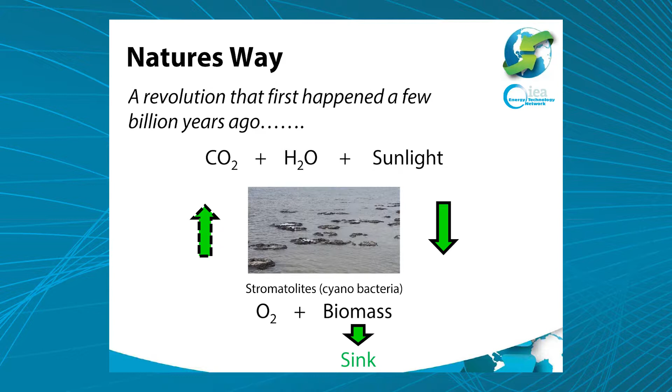So what's the source of our optimism about CO2 use? This has been the revolution that happened a few billion years ago that changed our world. Essentially, some organisms called cyanobacteria—this picture is actually of the stromatolites that I found at an ancient lake traveling through Western Australia. Those stromatolites are about 500,000 to 1 million years old. But rumor has it they were the first organisms that came into being that fixed CO2 in water with the help of sunlight and generated the oxygen in the atmosphere, and obviously generated biomass. That biomass went to sink, which is the source of a lot of our coal and petrochemicals. Obviously we are reversing the process when we use fossil fuels, not releasing energy back as sunlight but using it in other forms and putting CO2 and water back into the atmosphere.

So in order to be successful in utilization, we must in some fashion ape this process. Now, if I were to try and draw a diagram that looks at CCS, little U, and sustainability, this is the sort of diagram I would draw. Sequestered carbon, fossil fuels, when we use it, becomes a source of CO2. We can capture CO2, and if you look to your far right, if we don't tinker with that CO2 molecule and put it to storage, we've achieved a sort of limited sustainability, not quite complete sustainability, because the carbon is in a different form. But at least we are limiting some damage to the atmosphere.

The other option we have is, to your far left, where you use the CO2 to enhance the recovery of oils. You can use it for enhanced coal bed methane recovery, which needs to be worked at, or enhanced gas recovery. So you push out more fossil fuels, you offset the carbon a little bit, and the fossil fuels become a little greener. Now the challenge we face is whether we can go down the middle pathway, and that pathway involves tinkering with the carbon-oxygen bond.

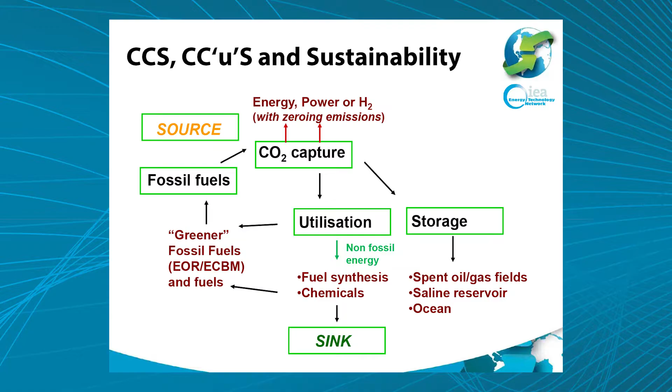That's what it boils down to. So that's the picture about sustainability. But as I mentioned before, as soon as we start tinkering with the bond, we hit a roadblock called the energy dilemma.

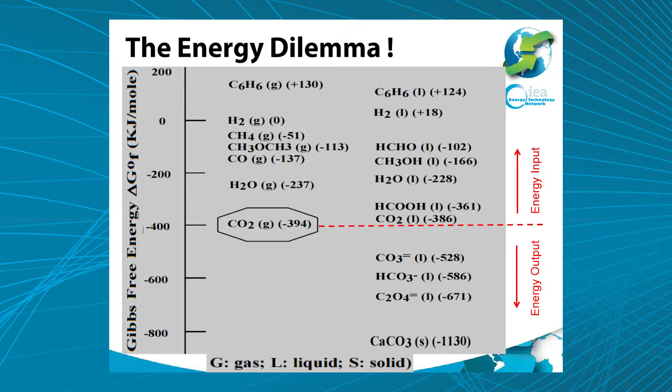This is a plot of the Gibbs free energy, and it looks at various chemical compounds. I've drawn a line across from CO2. Any molecule above that line, its synthesis requires the input of energy - you have to put energy in to convert CO2 into any of those chemicals above it. Any of the chemicals below CO2 are ones that will react and give you a little bit of energy in the process that you can recover. A leading example might be the formation of carbonates, where there'll be a net production of energy if you utilize CO2. So you have to be mindful of this when you're starting to tinker with CO2 in the utilization bond.

Next comes the chemistry dilemma, and this has to do with the emissions back into the atmosphere. Just about any chemical that you make, depending on how long you keep it in storage, at some point it's going to decay back to CO2, and it depends how fast that happens. So putting CO2 into soft drinks is a very, very temporary measure, for example.

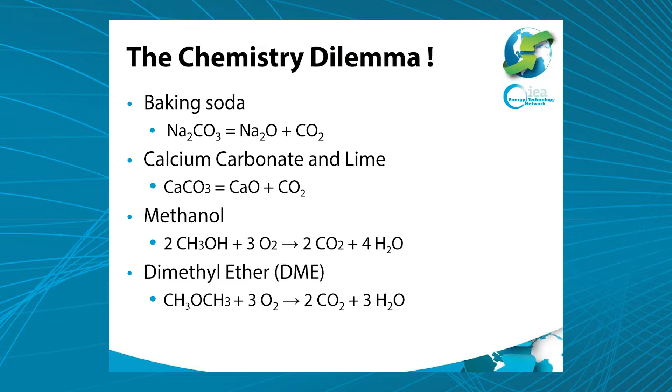If you make methanol, you run into a similar problem. If you make another fuel, dimethyl ether, you run into similar problems as well. Now the thing about carbonates is, often you don't find free sodium or calcium floating around. So in order to work with sodium and calcium, you have to naturally mine carbonates, expel the CO2 before you recombine it again. So you have to be very careful in terms of what you do. These are the two critical elements you have to look at.

So there are a number of things you can do in terms of making chemicals, fuels, all kinds of things. And the problem with this plot is, in the middle, you don't start with CO2 and hydrogen, you start with CO and hydrogen. In order to start with CO2 and hydrogen, you need to put in energy to get down those pathways, and that energy, I'm afraid, has got to come from a non-fossil resource.

So several options are available, most of them temporary at best. Let's look at the case of urea as an example. This is often one of the things that is touted, outside of EOR, as something you can use to utilize CO2.

So that's the chemical compound, and what it does is it eventually decays when you use it into CO2, ammonia. Ammonia is oxidized into NO3, and it also releases N2O, which is itself a greenhouse gas. The CO2 may be taken up by plants and roots, but eventually it's lost in the plant cycle when the plant dies or the soil is tilled. So it's a kind of interesting case. Clearly you have to do some life cycle analysis on it.

And if you go back to how we make urea: if you start with coal, you produce a syngas, you're essentially separating CO2, using the hydrogen to make ammonia, and then reacting the ammonia with the CO2. Except that when you're making ammonia from coal, you use twice as much coal to produce the hydrogen you need in ammonia. So you're producing excess CO2 anyway in the process.

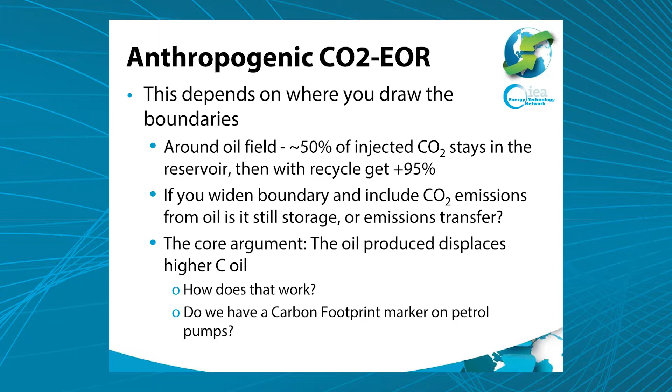Well, ultimately, you do end up putting some CO2 down for the oil that you produce. So the oil might be, if you like, produced less carbon intensive. But we have to be careful in terms of the steps we take with this. And we know that world oil demand is going to continue to rise. Global emissions from transport are rising. So we have to be very careful to make sure that it's just not a simple temporary emissions transfer.

We looked at the potential of CO2 utilization when we persuaded the IPCC in 2005 to write a special report. And then, when we looked at the consumption of CO2, excluding EOR, the potential was about 120 million tons a year. Some of the processes stored CO2 for several decades, and the century-scale storage equated to about 1 million tons a year in the numbers we looked at.

For CO2 EOR, looking at light oils only, the estimates that we've come up with in the IEA Greenhouse Gas Program globally pitch this at 60 to 120 gigatons of CO2.

We just saw a plot from Peter Cook earlier on that I think pitched the global emissions currently at about 39 billion tons a year. So that's what we are emitting. And if you look at what the IEA CCS roadmap says that we should achieve between 2010 and 2030, we've got about 445 gigatons of CO2 to put underground.

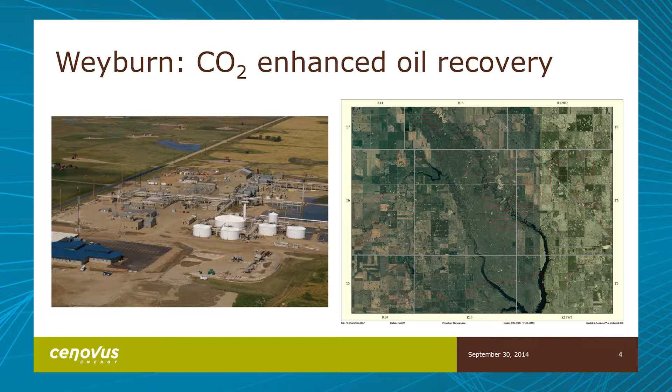We operate the project. It's a fairly large project area, 22,000 hectares, and we operate it on behalf of a unit. We're the unit operators, 23 partners in that unit. Our share of the unit is just over 60%.

Weyburn is one of Canada's largest enhanced oil recovery operations, as well as one of the largest CO2 utilization and storage projects. So let's just take a quick walk through some of the geology.

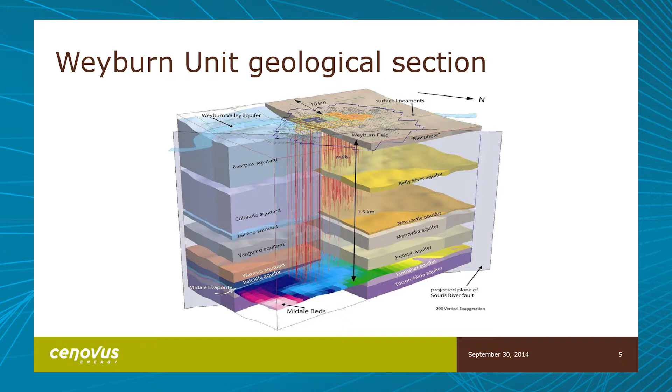The oil pool is part of the Williston Sedimentary Basin. It's about 1,450 meters deep. The oil is produced from the Midale beds, Mississippian Charles Formation. The Marly and the Vuggy are the two zones for that. The reservoir is relatively large, with 1.4 billion barrels in place, and we've produced about 30% of that at this point in time.

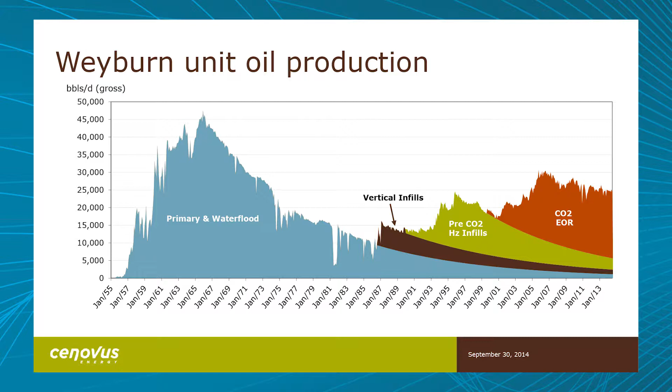And then in the late 1990s, we established a CO2 EOR scheme. CO2 flooding is expected to extend the life of the Weyburn field by another 30 to 40 years and lead to an estimated 200 million barrels of incremental oil production.

Although we've started a CO2 flood, we still use water flooding today and inject about 250,000 barrels a day of saline water for that water flood. Our production is about 26,000 barrels a day. About 60% of the Weyburn field is under CO2 flood.

So extending the life of the field isn't just good for Cenovus and our shareholders. It's also good for the economy of Saskatchewan and the economy of southern Saskatchewan where we operate, and investment in the community. We'll be investing in the community for years to come.

So really, what is CO2 enhanced oil recovery? In some aspects the technical details are complex, but really it's a simple concept. Under primary recovery, we use the reservoir's energy and mechanisms to recover some of the oil. Water flooding uses injected saline water to basically sweep more of that oil to the producers.

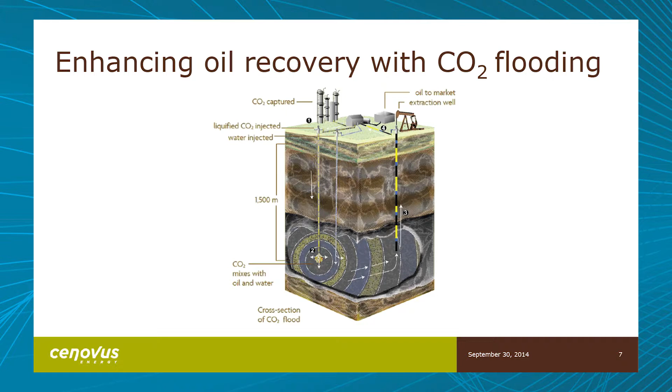For CO2 EOR flooding, it's really just like using a solvent to wash the rock. The CO2 is injected as a high-pressure liquid and washes the oil between the pore spaces. It effectively lowers the viscosity of the oil, and it swells the oil so that it expands out of the pore spaces. So it's a simple concept, really.

The CO2 and water are produced back with the oil. They are then separated and re-injected. This technique has been used in the enhanced oil recovery process since the 1960s, and it's quite common in the United States.

So what are a few considerations on the supply side for CO2? First, a large supply of high-quality CO2 is required, 95% pure as a minimum. It also must be stable and secure as a supply. Additionally, since EOR schemes are inherently expensive, another important element is the total cost to get the CO2 to the field gate and then down to the reservoir.

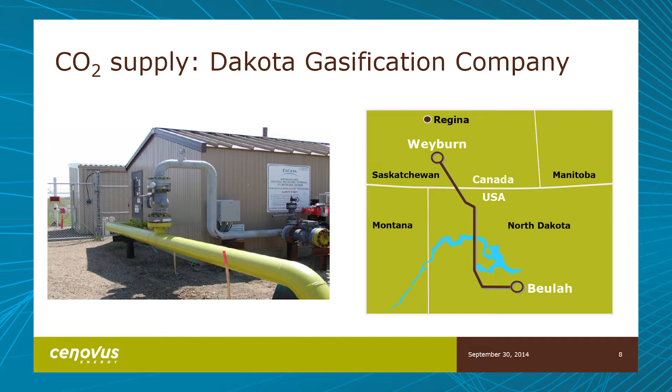At the start of our project, we came to an arrangement with Dakota Gasification Company in Beulah for a CO2 supply. DGC built a pipeline that brings high-quality compressed gas from Beulah to our Weyburn project. They still own and operate the pipeline, which delivers CO2 to our Weyburn project, as well as to Apache for their CO2 enhanced oil recovery program near Midale. The first CO2 injected into our reservoir at Weyburn was achieved in October of 2000.

First off, I'd like to congratulate SaskPower on their successful Boundary Dam carbon capture project. This new supply will ensure that we have a consistent and adequate supply of CO2, which is critical to maintaining and expanding our CO2 enhanced recovery project in Weyburn.

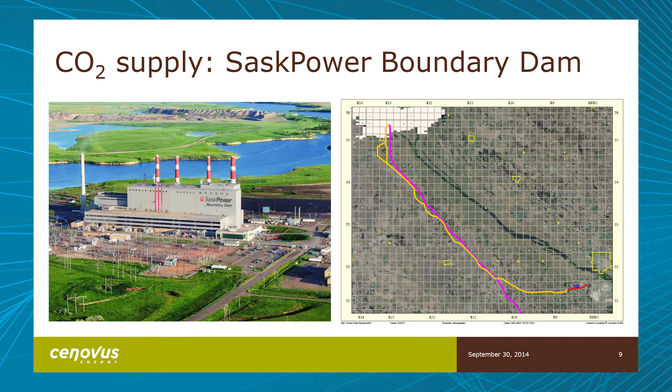In 2012, Cenovus signed an agreement with SaskPower for CO2 from their Boundary Dam project. As part of that overall project, Cenovus constructed a 66-kilometer pipeline from Boundary Dam to our Weyburn facility. To date, about 22 million tons of CO2 has been safely used at Weyburn since 2000.

Another aspect I can comment on is that this project, as well as Apache's EOR project, may be the most studied oil fields in the world. The CO2 monitoring and storage project was a collaboration between 6 governments, 9 industry participants, and many research institutes.

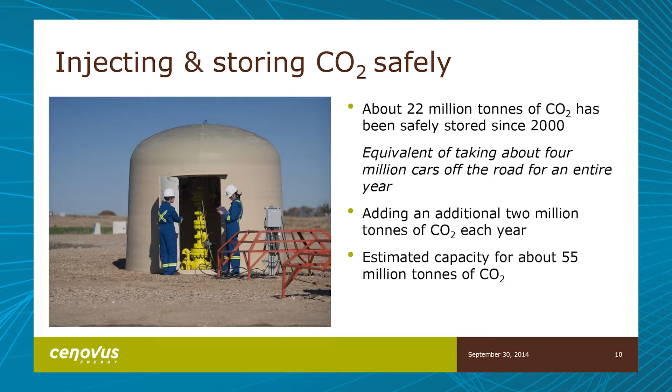The project has been managed by PTRC. The first phase verified the reservoir could safely and economically contain the CO2, while the second phase, which was just completed in 2012, resulted in the publication of a best practice manual for CO2 geological storage and a guide for field implementation.

So really, what does the future hold? I think we need to continue to move ahead on many of these fronts. Working with EOR as a demonstration and a synergy between the oil industry and power generation is a key aspect. Several other aspects we have to move ahead on, and we've talked about many of them today, and making progress is a key factor for us all. Thank you.

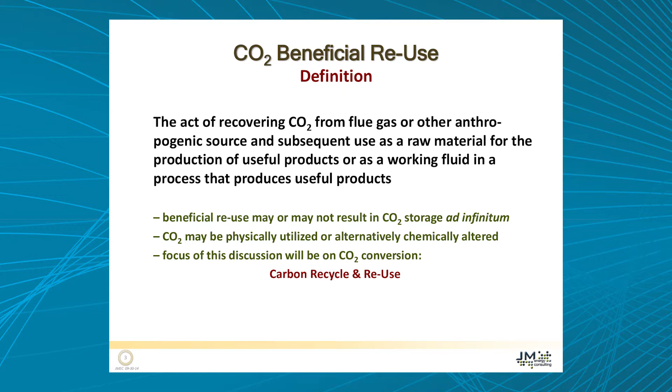And what I'm going to focus on - we've had a talk about EOR. I will mention EOR a little bit, but I'm going to focus more on this idea of carbon recycle and reuse.

Okay, we're already doing it - I'm going to use this as an example. In 2012, the U.S. consumed 14.2 billion gallons of renewable fuels, approximately 10% of the gasoline market. It was produced from biomass that absorbs CO2 from air at 392 parts per million. And if you do the math, half of that carbon up there is a result of the industrial revolution since then. So when you grow corn in particular, you're using fossil carbon because we've already put extra carbon in the atmosphere.

So where does that take us? Well, right now that's about 0.01 gigatons of carbon per year. It's not that much, and it's also not that renewable, so the benefit is much smaller. But again, the renewable fuels industry is also evolving, just like CCS is evolving. So they have a lot of room to improve and make greener, low-carbon fuels.

I think I would change this to say when we meet the renewable fuel standard. I don't think it's going to be in the U.S. in 2022. If the program continues, it's going to go up 0.03 to 0.05 gigatons recycled. One goal of the Department of Energy, sister organization to fossil energy, is to get to 1 billion tons, and they've done studies to show that. So that's like an order of magnitude greater.

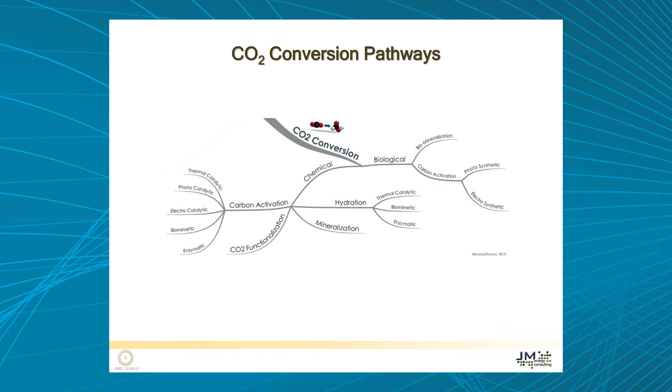Now, these pathways really boil down to three different flavors of CO2 conversion, and Kelly talked about this. There's mineralization—you're actually oxidizing the CO2, so there's potential for a slight exothermic reaction, getting some energy out. There's functionalization, adding CO2 to chemicals. Most chemicals we use are polymers, organic compounds, or built from organic compounds. So if you use CO2 as the source of that oxygen, you have the potential of improving efficiency while consuming some CO2 in the process.

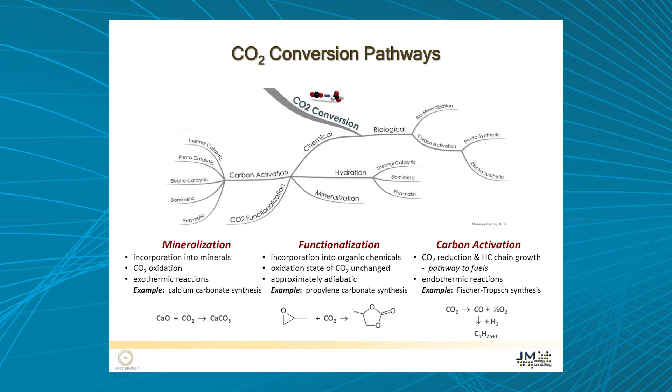And then really the holy grail is carbon activation—that's reducing CO2 and growing hydrocarbon chains. That's a very endothermic process, and the example of that is again Fischer-Tropsch synthesis, which would fall into that category.

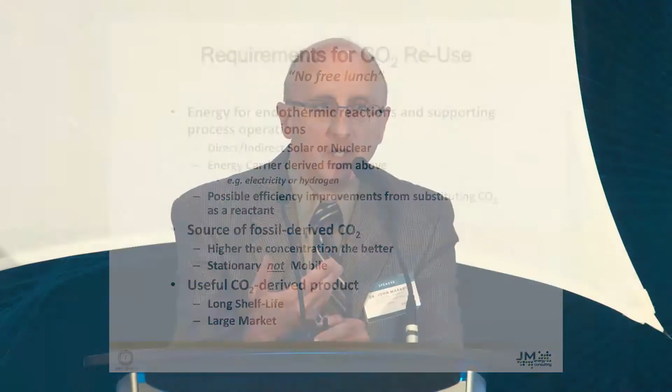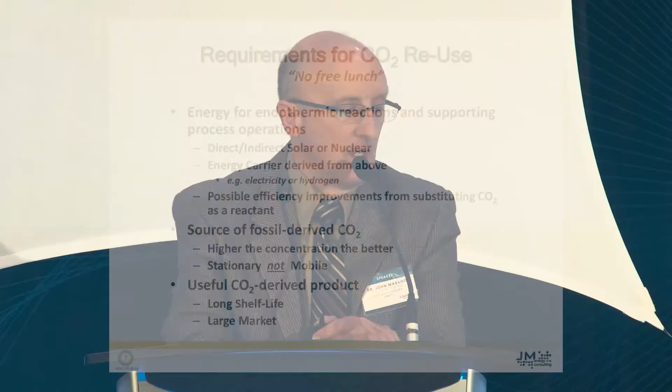Now, I won't go into this—Kelly did an excellent job talking about the energetics of it. So there's no free lunch. When would this make sense? If you require energy for endothermic reactions or any of the supporting processes, you have to have an outside source of energy. I've seen a lot of schemes where the power plant produces the energy to make chemicals from the CO2, and that's not possible.

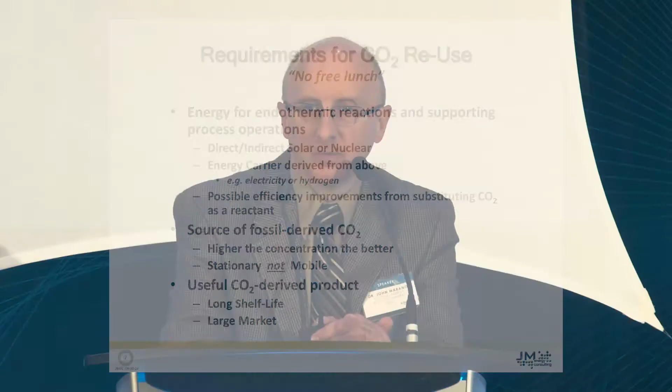So in that case, you need a renewable source, or nuclear energy would work for that. But you also have, when making products other than fuels, the possibility of efficiency improvements by using CO2. Again, in making organic chemicals you're wanting to add oxygen, so CO2 could be a source of that oxygen and improve the efficiency of the process. There are companies working on that—in particular Europe is ahead on that. Bayer is involved, doing work in that area.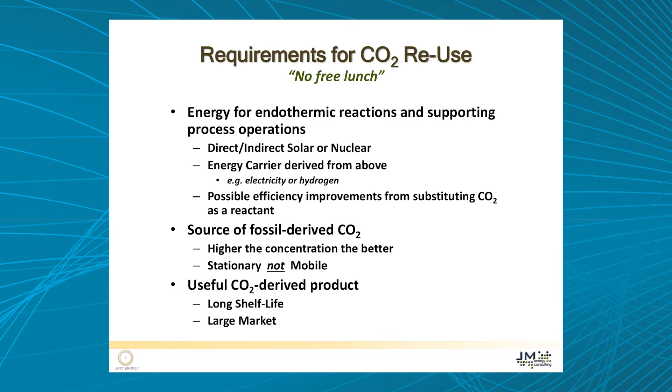What I want to do here is walk you through the kinds of things you can do, and I do have a slide on EOR. What I looked at when we were doing this was what had the greatest potential, but I think you also have to look at the economics. So anything that's going to help mitigate climate change, that allows carbon capture systems and sequestration to move forward, is positive.

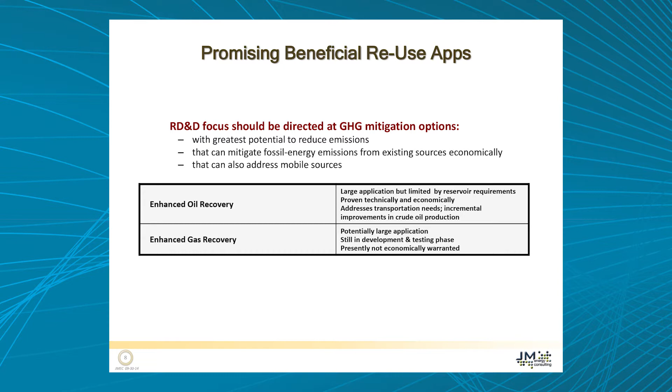So if you're making a small amount of a valuable material, it could improve the economics of the situation. There are some utilities in the U.S. that are looking at this as the low-hanging fruit. So if you regulate me and say I have to do 30-40% CO2 reduction, if 5 or 10% of that I can do with some useful product, that just lowers the cost of capture.

Now my focus has been on biological conversion, but I don't want to leave you with the idea that that's the only one or the preferred one. So these aren't in any order. Biological conversion to liquid fuels, chemicals, and food.

One of the issues with biofuels you always hear is food versus fuel. If you talk to people in the advanced biofuels industry, a really nascent industry, especially the algae companies involved in algae development, they say food and fuel. They're not talking about necessarily wanting to eat the algae, but a high-value product is feed for production, primarily meat and fish.

So if we go outside of enhanced oil recovery, which is commercial and has economics and is technically possible, algae is probably the closest. I see some demo plants really coming in 5 to 10 years, and the economics is driven like the economics of CCS. It's a regulatory-driven thing, basically by low-carbon fuel standards. So there's a driver for that.

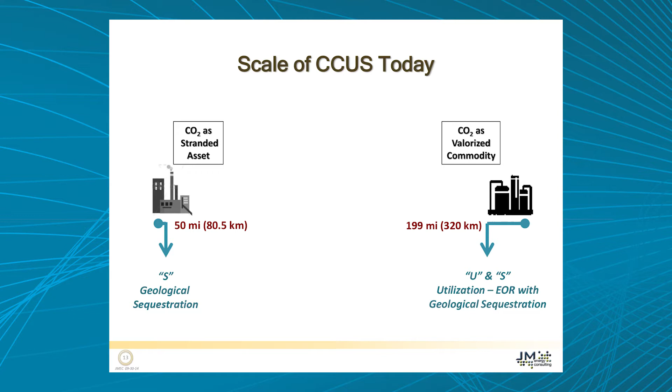What we need in the future is to connect this up. The driver here is that if you can't get something to a market, it's not worth anything. So I liken this to building the transcontinental railroad in the U.S. and in Canada. The idea was to connect the east and west coast, and the result was build it and they will come.

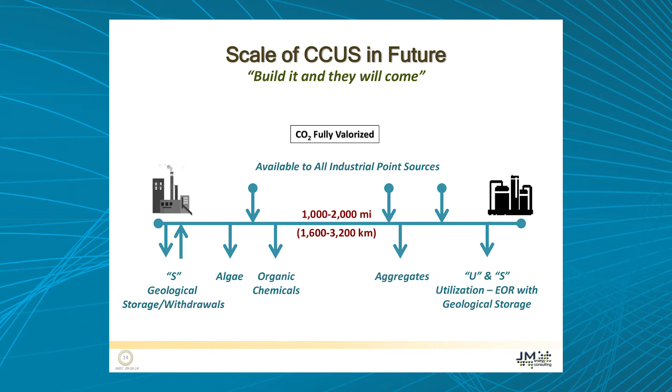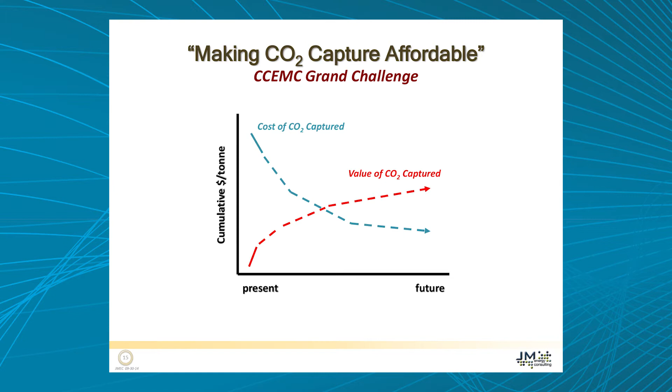So now I'll finish up. One of the things I wanted to mention was making CO2 capture affordable. Conceptually, we can talk about the cost of conversion and capture. And we may never get to the point where the value of the CO2 captured is greater than the cost of capturing the CO2. That might be a pipe dream, but anything we can do in the near term to move things forward is a valuable thing to do.

We're not moving fast enough, and these are the kind of things that I believe will get more acceptance to the problem. I want to finish up by paraphrasing Marcus Samuel, founder of Shell, who was talking about crude oil at the turn of the last century: the mere capture of CO2 is also its least valuable and least interesting state. Markets and technologies to support them have to be found. So that's where we're at with utilization, in my opinion.